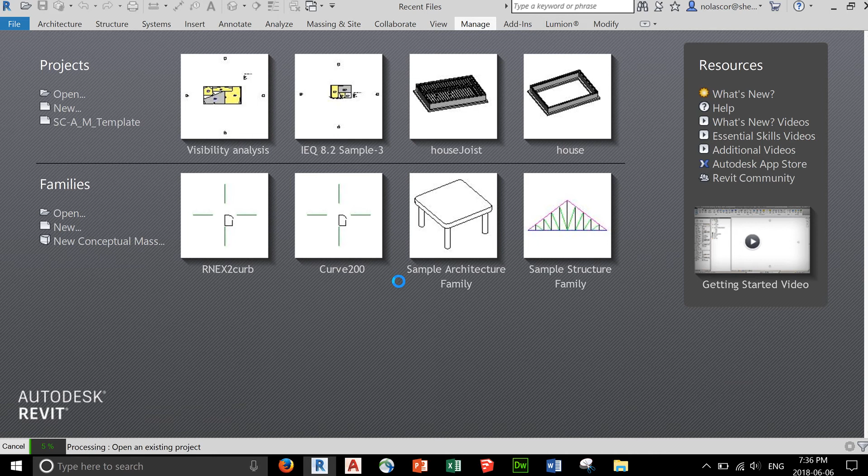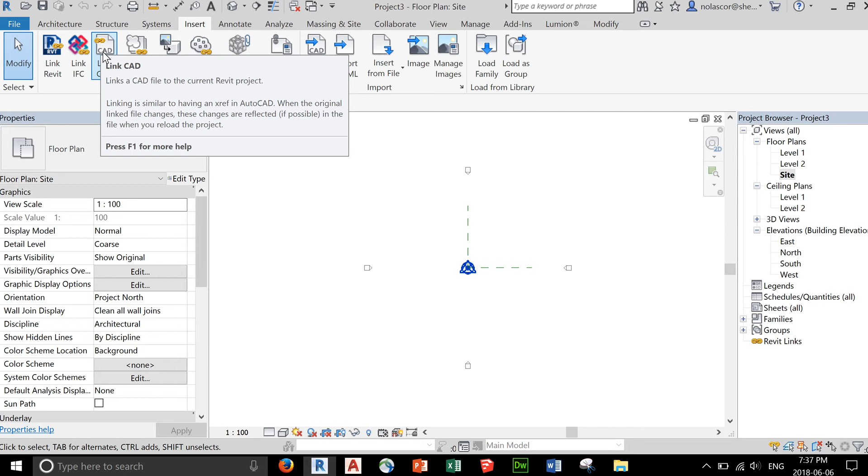And from here, you're going to go to your site plan view and insert the CAD file. So we're just going to link the CAD file, and then we're going to unlink it. Since it's a huge file, we don't want it to be carried in and embedded into your Revit file. So link CAD, go to the folder where you have downloaded that particular DWG file.

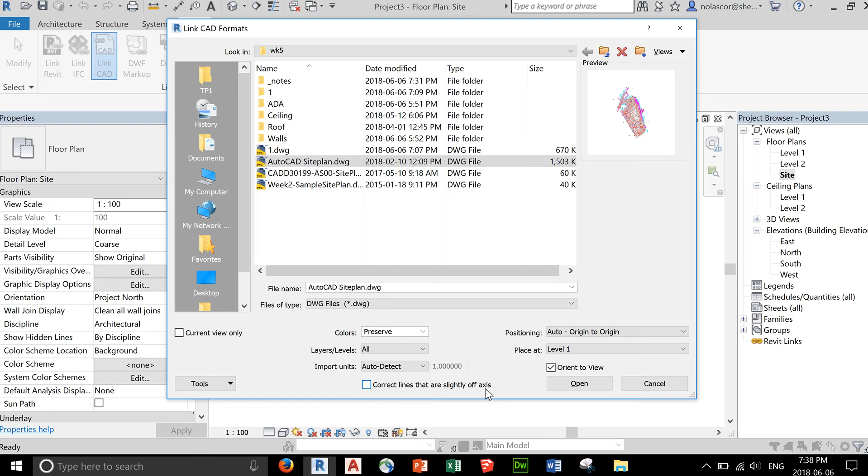Since this is a 3D drawing, we don't want to just see it in our site plan view. So uncheck current view only. Since we're going to unlink this file anyway, you may leave invert. No need to convert it into a black and white. It's actually nice to maybe even preserve the color. Okay, layers. We'll import all the layers and just say auto detect. Auto origin to origin, level 1 is the only option. So orient to view, uncheck correct lines that are slightly off axis. Once you have all those settings done, click open.

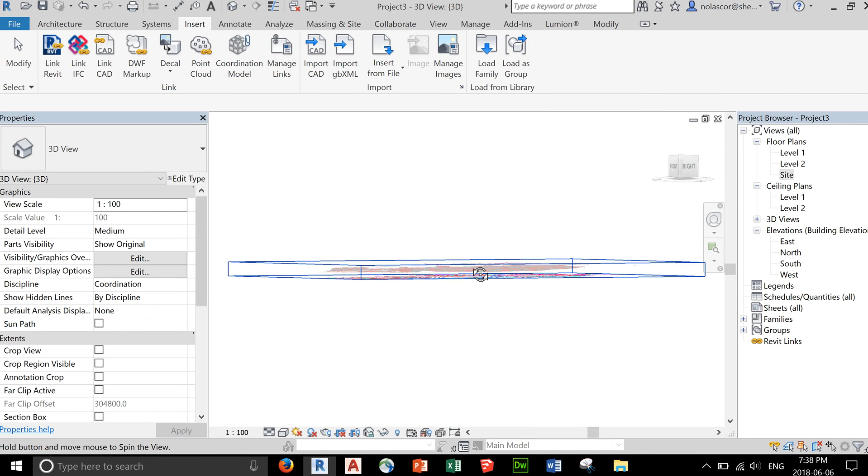Now, depending on the speed of your computer, this might take a while since it's a large AutoCAD file. Once you have the AutoCAD file, you'll notice that if you go to a 3D view, this is indeed made out of contour lines and they are plotted in different elevations. You can go to maybe an elevation view to double check. Okay, so those are your contour lines. Okay, let's go back to our site view.

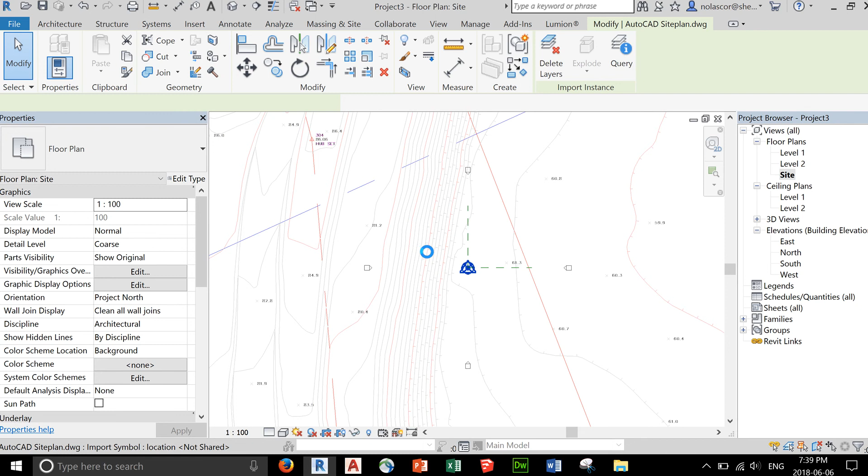And from here, we need to check by selecting your imported or linked file, the different layers used for the contours. So there are different layers for the text, for the road, for the north arrow. So we want to query by clicking on this query button right here, the different layers used for the contour. Now you can do this in AutoCAD, or if you're the one who drew this, of course you know the layers that you need. So here we'll just take note of this particular layer.

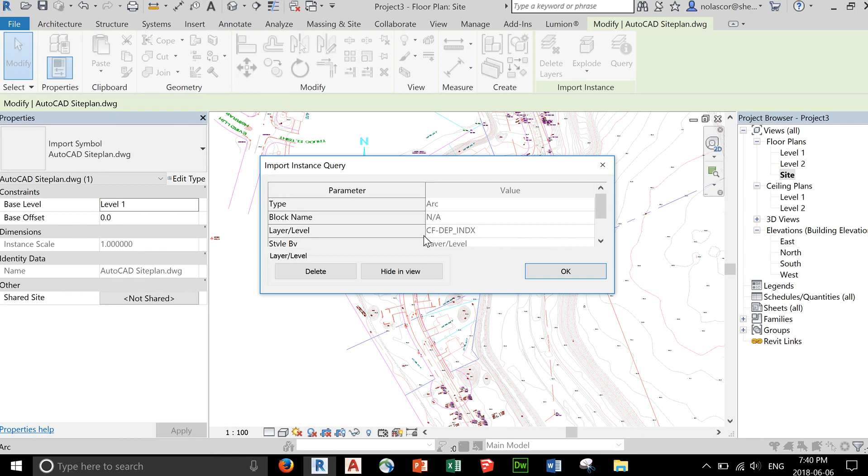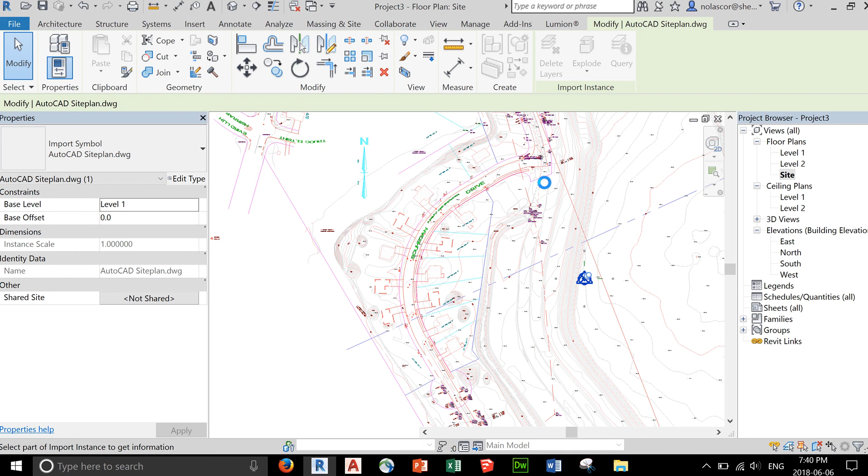Okay, click on other contours. Okay, that layer, and maybe if you go somewhere out here. So I think those are the layers that were used. If there are any other layers, it shouldn't matter at this point. So just make sure that you know the layers where those contour lines are placed.

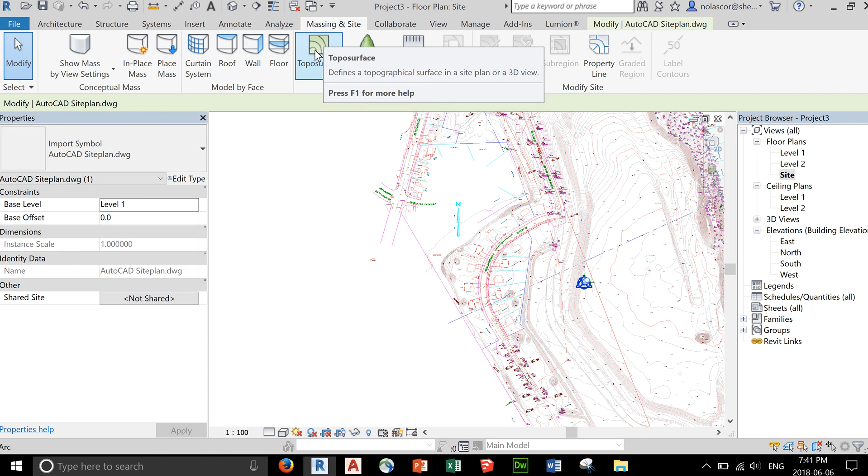Once you know that, then you can go to Massing and Site, create a topo surface, and normally you place points. And if you notice, there are a lot of points that you're going to place to recreate those contour lines. So instead, we're going to create from import, select import instance. Okay. Select, add points from selected layers.

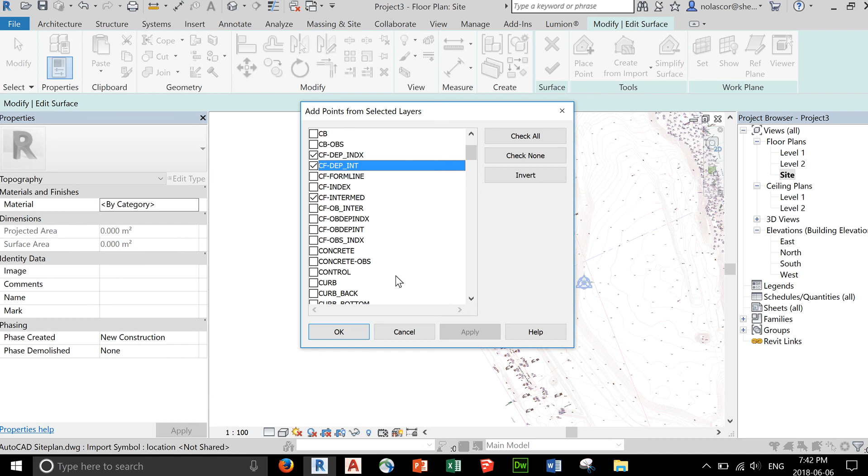All the different layers are currently checked, so you can easily say check none. That will deselect all the currently selected layers and look for the layers that we have queried earlier. I think that one. Okay, CFOB inter and CFOB index, or I think it was dep, not OB. Okay, click OK and let Revit do the work. So it might take a while.

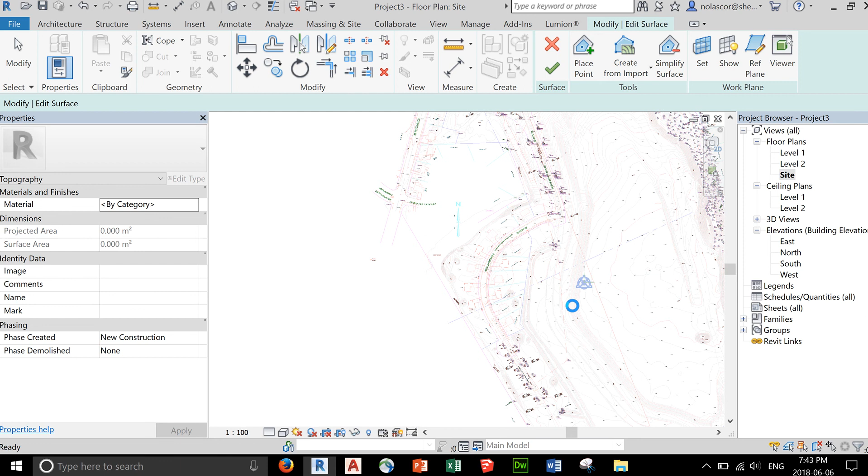There you go. So you have all your points. Notice how many points were placed. And if you click on a point here, you'll notice that that particular point is similar to one of the points that we normally place when we create topo surfaces. And it will have a specific elevation. So that's that elevation right there. And if you go down here, or maybe up, this here is at this elevation.

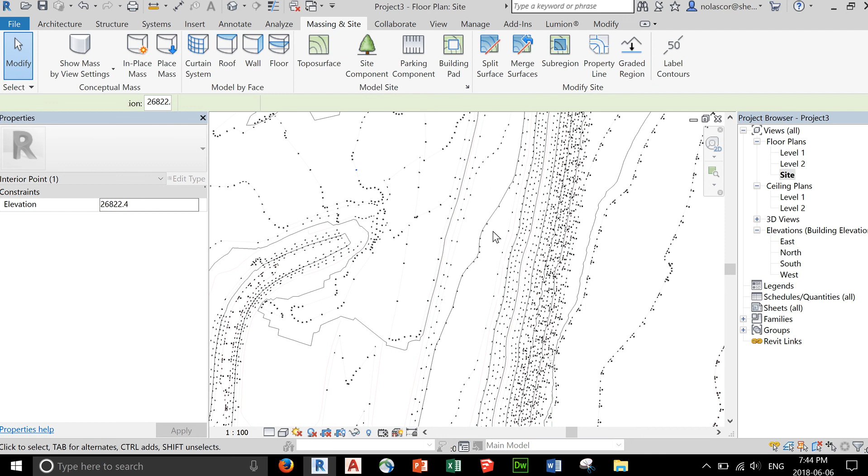Okay, so once you're done, click OK, finish surface. And then you can unlink your AutoCAD file. So maybe select your AutoCAD file in a 3D view. Zoom out. You know you're selecting your AutoCAD file because you have that box. Okay, maybe click on that line right there. Select.

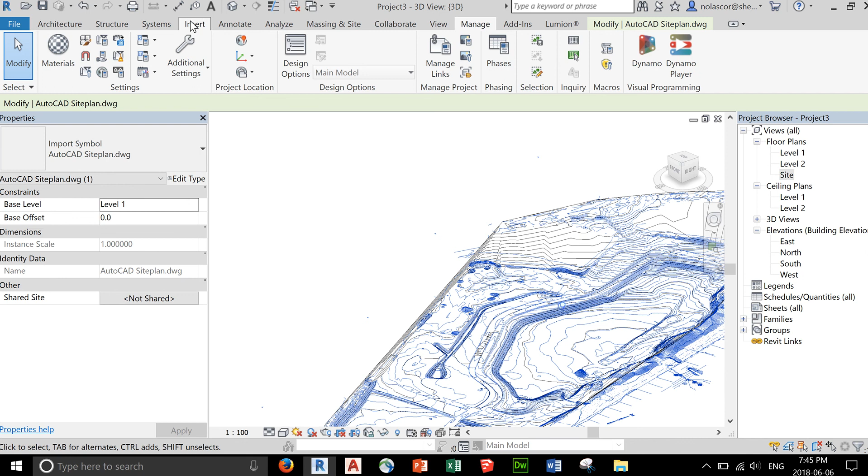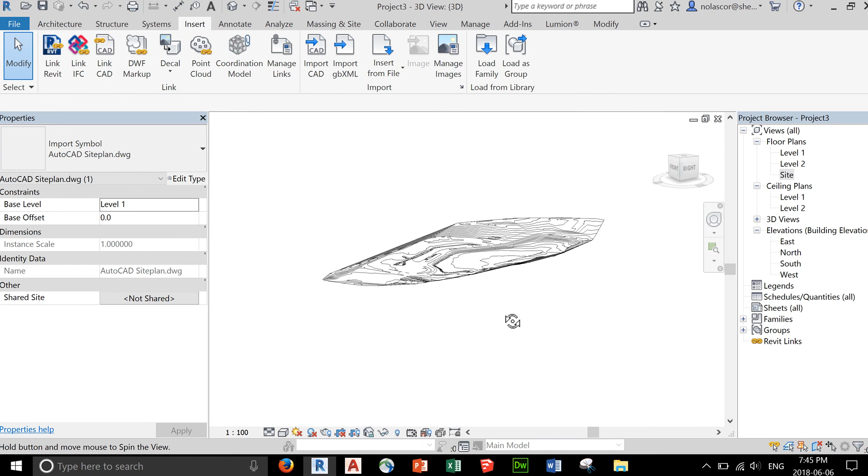Or instead of selecting, you can actually go to Insert, Manage Links. Go to your CAD format. Select the AutoCAD site plan DWG and unload. Click OK. And now you simply have your topo surface based on your AutoCAD drawing.

Okay. So I might have selected more than I needed, but you get the idea. Okay. Go to a shaded view. I might have selected some that are not part of the basic contour. Okay. So do be careful with the contour lines or layers that you are selecting.